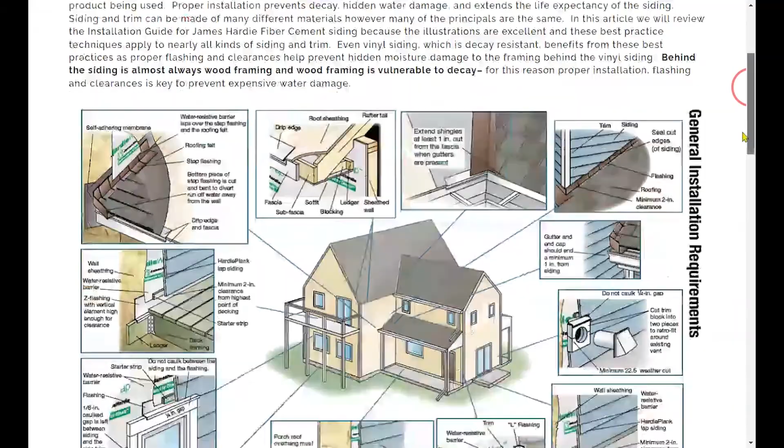And so here we have the James Hardie general installation requirements for their Hardie plank product, or all their Hardie products. The reason why I've picked this installation guide is because it's really beautifully illustrated, and it's best practice for all kinds of siding, including stucco, masonry, vinyl, wood, pretty much any kind of siding.

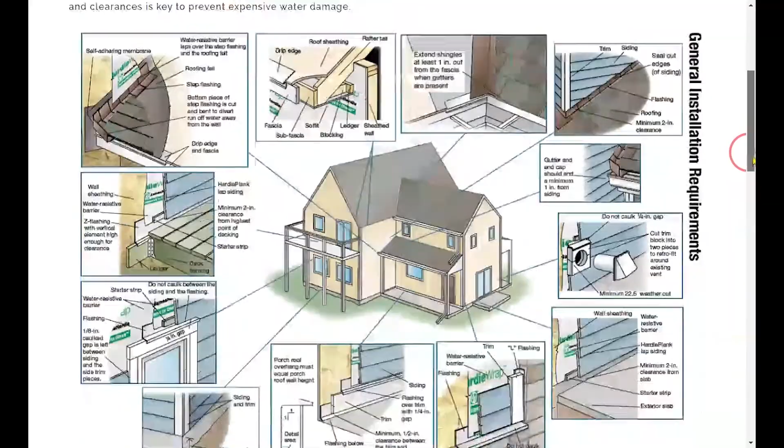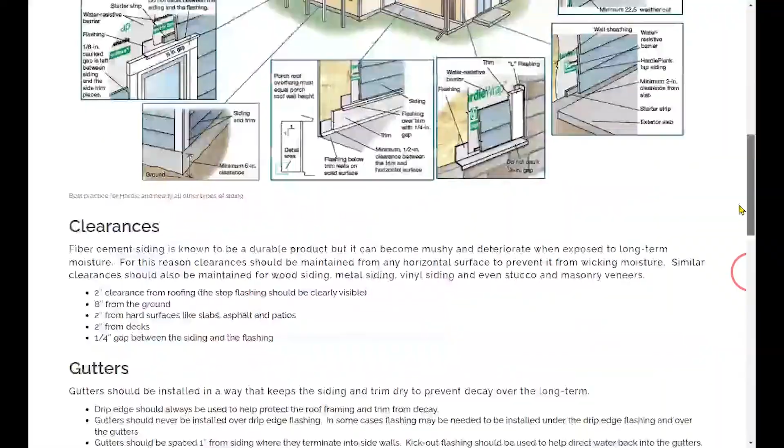These are best practices. And so the things that we're looking for are proper clearances, good gutter installation, and good details, flashing details, and spacing at transition areas and pipe and flue penetrations. So we can just go over some of these images here.

Here, where they install the siding near or above the roofing, we want to see 2 inches clearance. So you should clearly see the step flashing in between the siding and the roofing. It seems strange to have that much clearance, but if there's snow or standing water, that's going to prevent the siding from wicking moisture, and that will save a lot of money over the long term.

Another detail we like to see is where the gutters terminate at siding. We like to see a 1-inch gap between the gutter and the siding. And this is called a kick-out flashing. It directs water back in toward the gutter.

If this gutter gets clogged with debris, instead of water overflowing against the siding and keeping that wet, now we have this proper spacing, and this kick-out flashing also helps to direct water back into the gutters. This helps a lot. It's very common to see decay all along here where the gutter intersects with the siding.

This is called a block penetration. So dryer vents, flues, larger pipes where they penetrate through the siding. A lot of times we'll just see that they slap on a lot of caulking around there. What you really want to see is a block piece of trim.

That could be MiraTEC, a composite trim, could be PVC. I like PVC, it doesn't really decay. So a block and then metal flashing over that, and then a hole drilled through that block. That's the right way to install block penetrations.

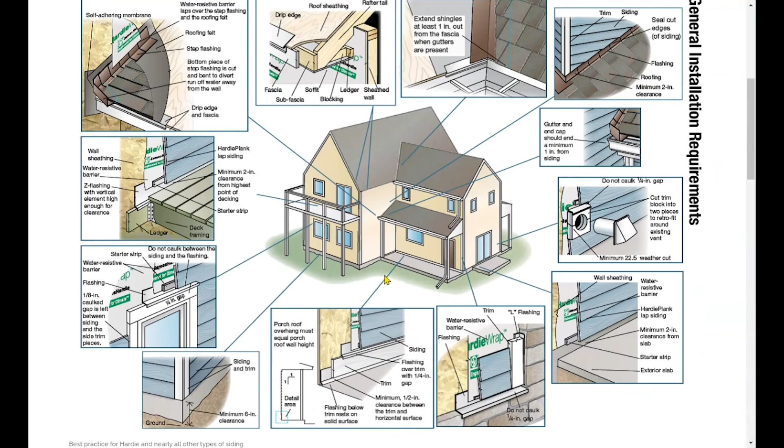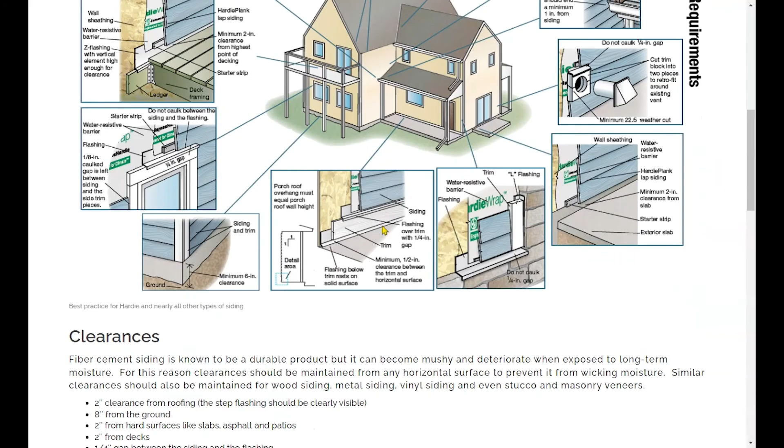So these are some great examples, illustrations of proper clearances and flashing and installation for all types of siding. This is specific to Hardie, but these are great illustrations. So if you want to read all this information and see these illustrations, type in siding in builderbuddy.com and you'll be able to view these.